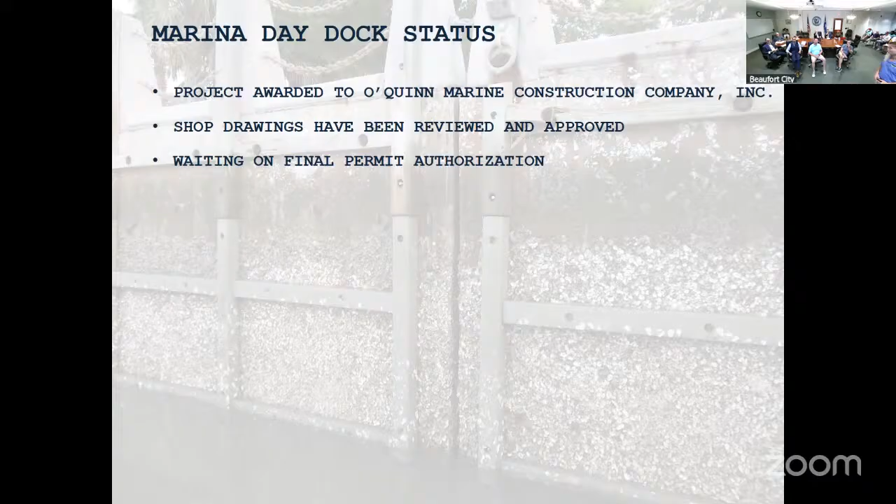So the project's awarded to O'Quinn. We've reviewed and approved the shop drawings, and we spoke about the permit already. Everything has been sent in a couple of months ago now, and everything is off public notice, meaning none of the other agencies or the public have had any comments. It's all a paperwork thing now, and I'm hoping a phone call or two to the right people will get some permits coming in shortly.

Just to go over the day dock, this was part of our scope in phase 2. What we did is we permitted the re-access of this. Originally, what we wanted to do was take this gangway off, send it to the manufacturer, have them take 5 feet off of it so we could put it back on a new platform we have to make, since we can't use the relieving platform and need a new platform to hold the gangway.

Our hope was, since this gangway is only 5 years old, to take it off, have them modify and certify it, then send it back for us to reinstall. But the engineers at CMI Gator who made that said it's a Warren truss design, and because of the way the truss is designed, we can't just hack 5 feet off of it. Engineers, what can you do? So unfortunately, it forced us to buy another gangway that we hadn't anticipated purchasing to get the access back, which did increase the price of the project. That wasn't foreseen at the time, but essentially a new gangway will go in. Let's go to the next slide.

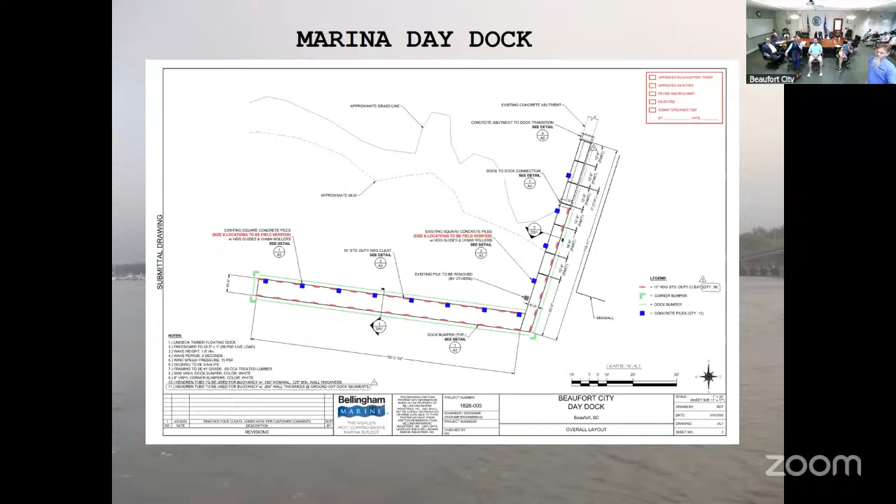So if you go back up a couple of slides, you stop it in the middle, you've got plenty of room past the trees. Go forward again, right there, stop, right here, so this is at 45 feet. If we're going to go another 80 feet, we'd be at the other end of there. Why didn't we do that originally? Well, originally we wanted to reuse this gangway, so that was not part of the original plan.

When we found out there wasn't really enough time to go back, we were trying to get this done quickly. There wasn't enough time to go back and rebid it with an 80-foot long gangway in here. So it was the best option.

But given more time, we could have potentially saved money, is that right? Potentially, I guess you could take this 80-foot long gangway off, turn it around, and have it go that way, then just buy the 75-foot long gangway. But then you're cutting this area off entirely. I'll be honest, I did not look at how far out this would extend with the other 80 feet, where that would be. Maybe it would be feasible.

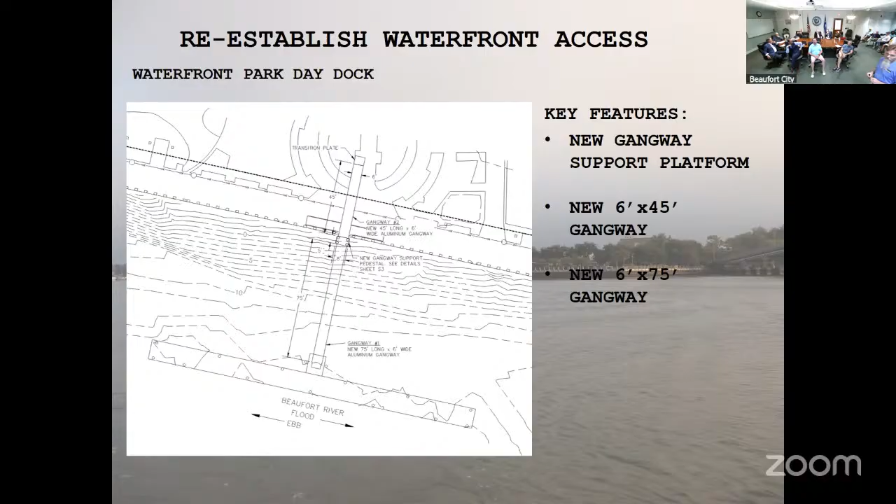The platform where the new dock is going to terminate — are those piers concrete or steel? They're steel, and they're driven. Yes, no concrete at all. Okay, beams? Round steel pipe, half-inch steel wall, 18-inch diameter, 70 foot long, half-inch thick steel plate, spiral wound.

These are galvanized — essentially the same pile that's holding up the floating dock. The piles going over here, just in terms of cost, we're getting coal tar epoxy; those are going to be black. We're getting them coal tar instead of galvanized because the thought is this is a temporary structure, not designed for 50 years, since presumably in the next couple of years we're going to replace the relieving platform and the tie-in and whatever connectivity we're going to have there.

If this was going to be a 25, 30, 40, 50-year fix, would this design look a little different? Probably — I probably would have used concrete piles and a concrete cap, but structurally this does what we need it to do for the next several years until we get our replacement in. So that will be 4 piles, then some HP 14 by 73 wide flange sections, and an aluminum frame that all the aluminum ties into. That's what we've got.

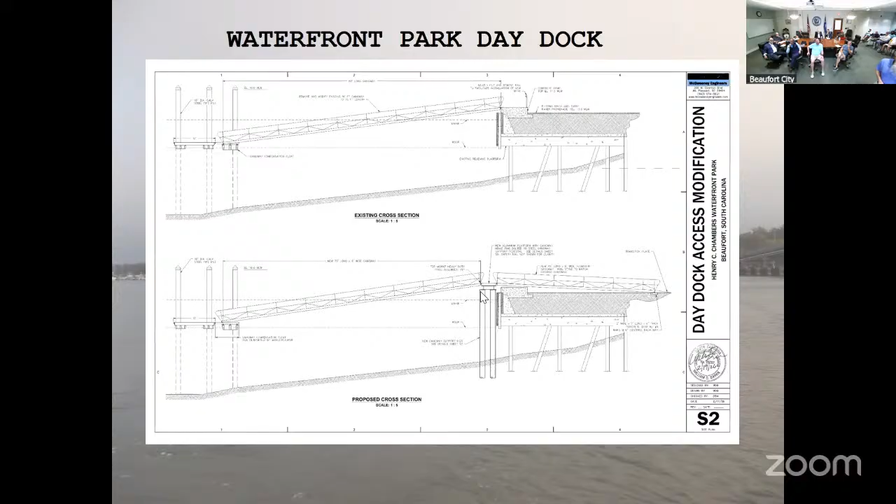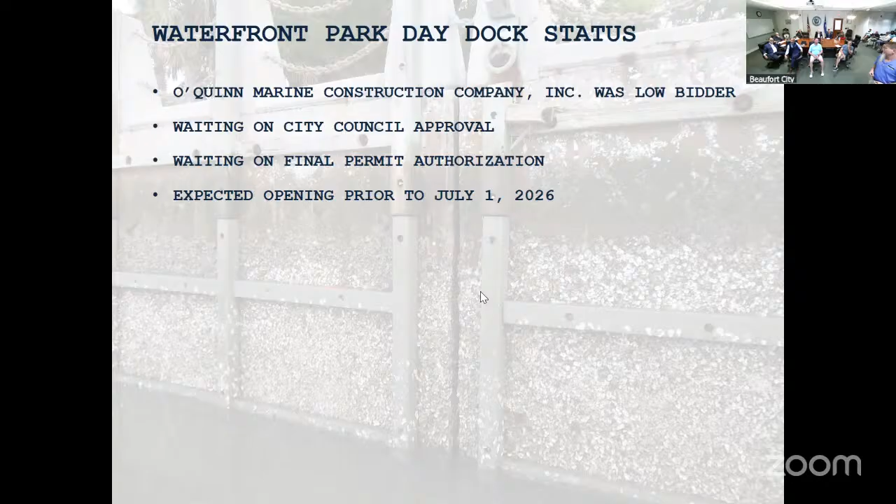Duncan spoke to this, waiting on the final permit, council approval tomorrow. Opening is expected July 1st.

Back into the actual phase 2. If you guys remember, we did the original investigation. We came in here and pitched 8 potential scenarios, just throwing it all at the wall to see if it could stick. We talked about that, took it down to 5 feasible alternatives, and said let's investigate a little more. At the same time, let's find a way to create renderings that engage the public and get some public input and engagement.

I know this committee developed the questionnaire, the poll you guys sent out. We got a copy of that and went through all the comments. A lot of the illustrators who made the renderings took those comments into consideration, so there was a conglomeration of what we'd talked about here plus your comments. We went through options: do nothing, repair, rebuild the platform essentially the same style as existing, relieving platform or wharf, rebuild with a seawall by filling it in, or do a hybrid approach.

Essentially what we did in this phase is just a little deeper dive into those and come up with some, hopefully, pretty pictures to engage the public. The thought is that we're going to do that next Wednesday. So if you will launch that PDF.

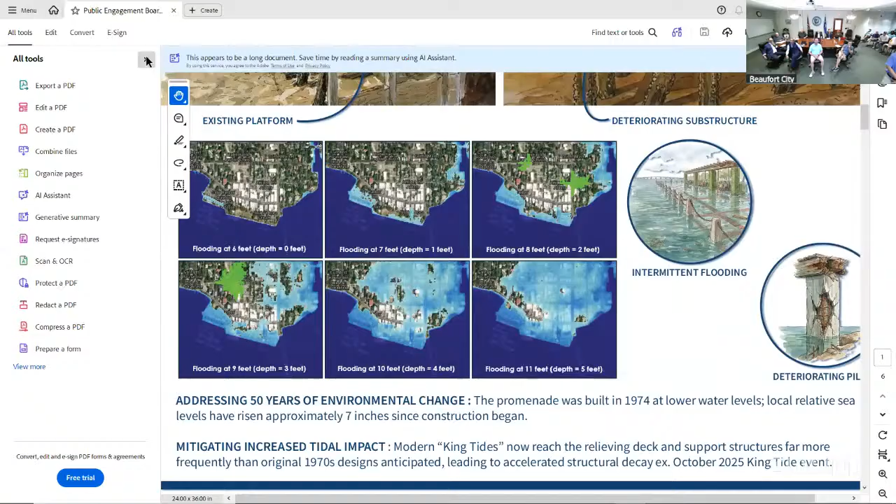The plan is to print, I believe we have six of these boards, out in large format, full size, and use them to engage the public over at the pavilion. We're still determining the exact method we're going to use to collect their feedback as a result of that presentation, but I'll go through the slides and show you what we got here.

This illustration of existing conditions out there does a good job showing some of the pile deterioration, a pretty good rendering of what's out there now. This line represents basically where the top of the platform is, as a representation of the inundation level, pretty much king tide flooding, right at about the level of the pier, maybe a little higher.

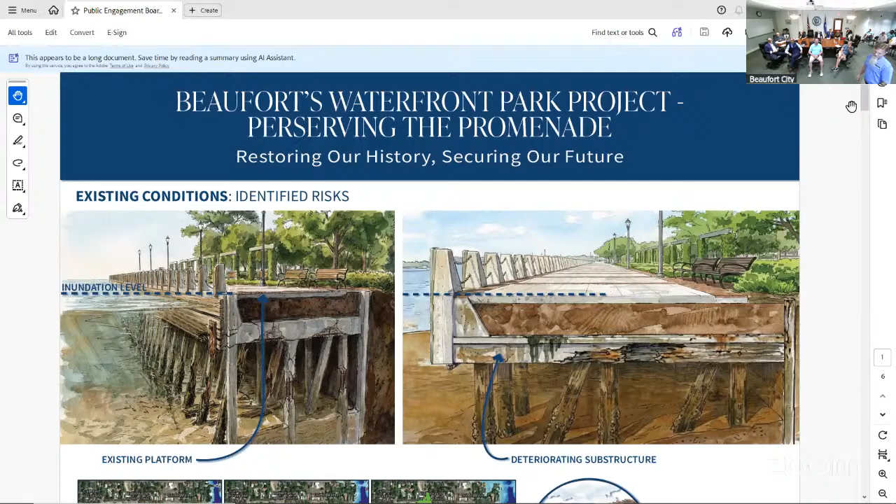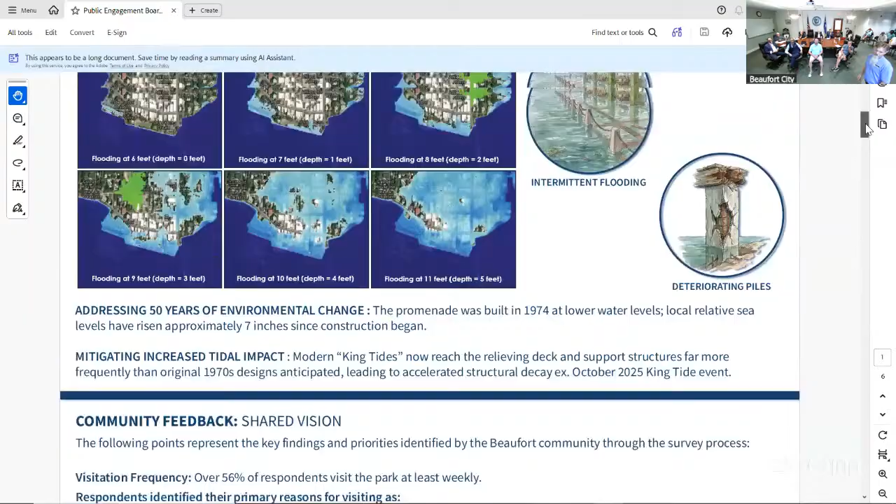If you scroll down on the same page, this will be out on the website as well. You guys have seen this graphic before that we discussed with you. It shows the flooding at 6 feet, which is about where the top of the platform is now, at 7 feet, the type of flooding you get, all the way up to 11 feet. If you remember from our real early analysis, we said at 9 feet is about the most we could do to protect downtown before you start getting wrapped around from the other side of the peninsula.

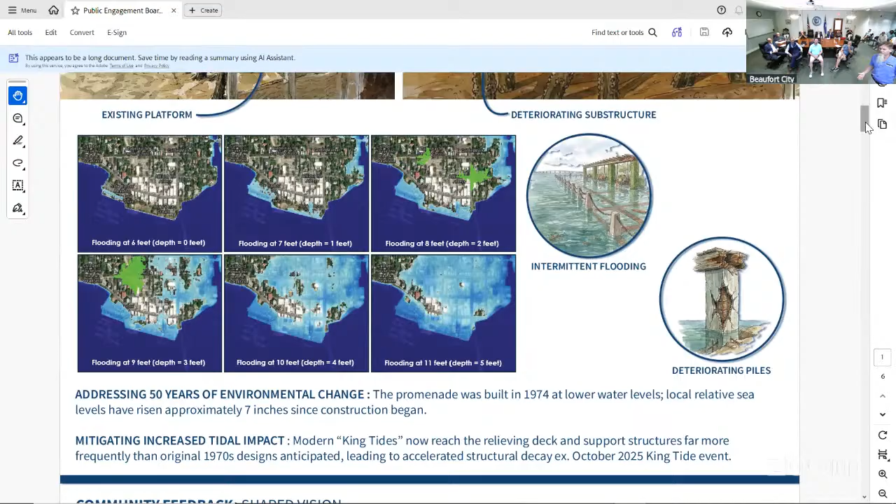And then we spoke to this thing called adaptive capacity - how do we meet that 9 foot elevation in the future when we're really going to need it, but not spend all that money today to get there? I'll go into that a little more, but this slide will also be up on the website for people to understand the flood conditions and the deteriorating piles, and that's the need for this project.

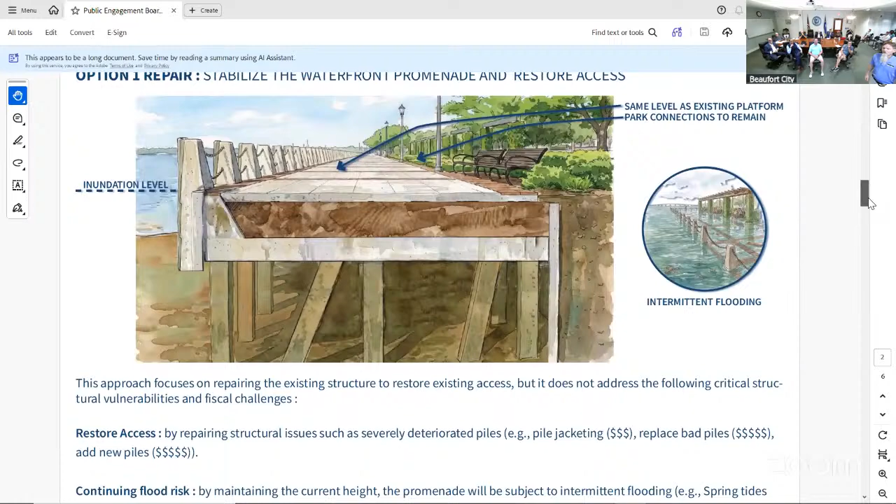If you go down to the next slide, scroll down a little more - I think this is the repair option, and the more we looked at it, repair is just not feasible because you have all this extensive shoaling in here. It's extensively shoaled in, so you don't really have access underneath. There are a lot of places where the mud line comes up to the bottom, and I can't even squeeze in up under.

This is 6 feet of dirt you'd have to dig through to get to the structure from the top. When you put all that together, you realize any repair scheme, if you could come up with it, could potentially end up costing more than just rebuilding the facility, just because of the logistics you'd have to go through to even be able to get to what you're working on.

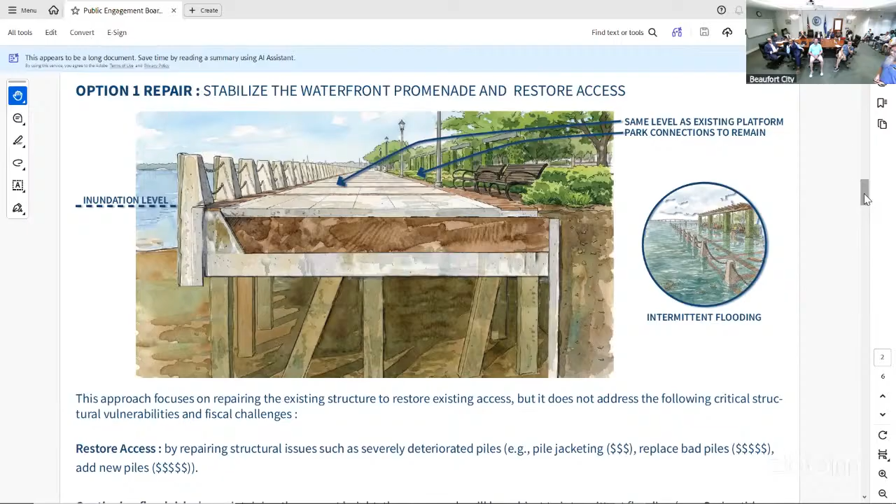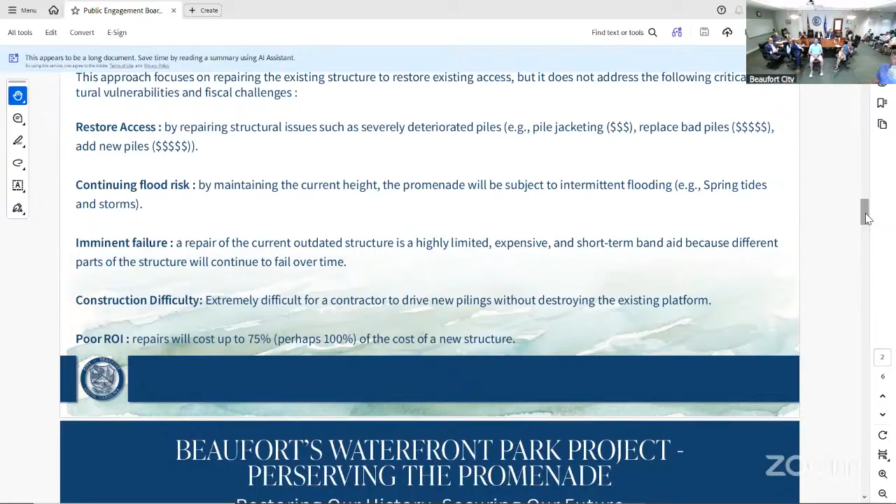You can scroll on down this page. I didn't want to just spend this time reading everything off to you guys in this format, because I figure we can spend that time more constructively. But we did put some language in here that's been reviewed by the city that speaks to the feasibility of these options, what the pros and cons are, because that's really what phase 2 for us was: a feasibility study. What can we go back to the people of Beaufort and say, look, we've really looked at this, we've looked at all the angles, and from a cost, regulatory, from all the angles, this is your best option.

So the other thing we want to do for the public meeting, whether it makes it to the public meeting or the website, is Eric had a really good idea. We have these gauges, kind of like a speedometer, with different criteria we've set up: permitting, cost, longevity, or whatever it would be, and just have little meters that show each option, where you rank on a scale of 1 to 100. It's just a 1,000-foot view of the impact of each option, a grade attached to each one. This is how we've kind of ranked them, and that's the type of input we're hoping to get back from constituents too.

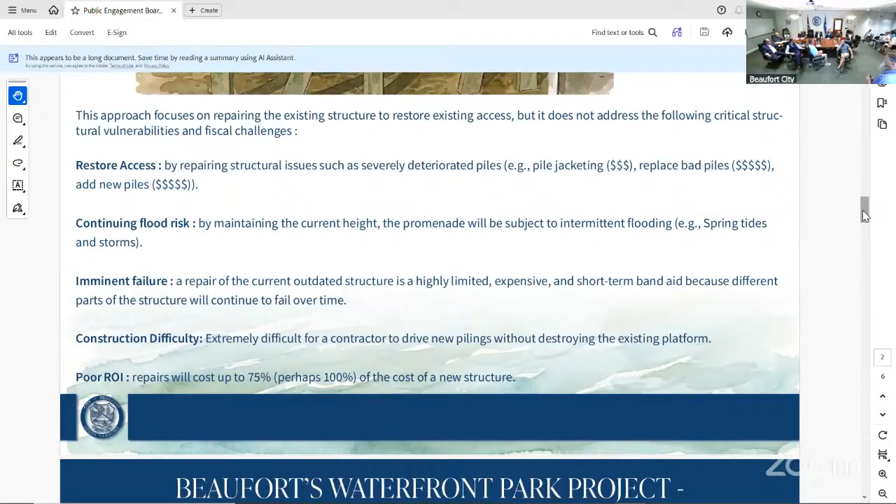And this website you're talking about, this is a city-dedicated website to the Waterfront Park project, separate from the capital projects portal, just to pull this off to the side and make sure there's one place where everything lives. One-stop shop. That has these videos from the Waterfront Advisory Committee, as well as any kind of details, past, present, and future for the project. Okay, like a clearinghouse. So yeah.

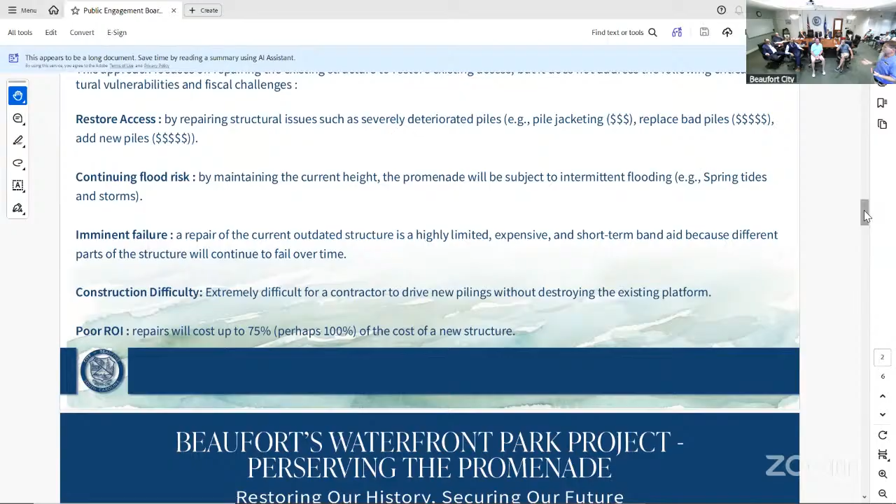So again, with the repair, it's a poor return on your investment. That's really what that comes down to as well. And I don't really know that a repair scheme would be any faster either, in terms of that. So you can go on down to the next slide.

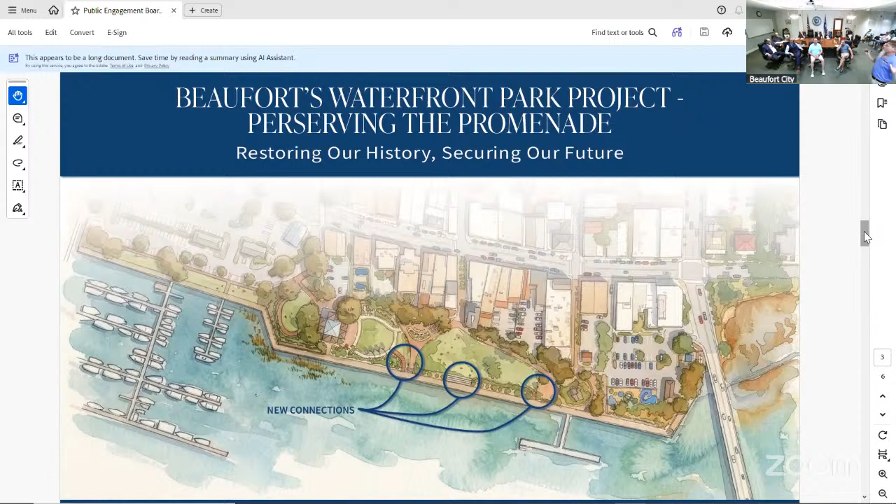So the next couple of slides are going to talk about the new structure alternatives. Option 2 is to rebuild back what you have. It would be the same relieving platform, but we would build it as a wharf. There's very little difference between a relieving platform and a wharf, it's a little semantics here. Basically, it's going to be a higher freeboard, and it's not going to have 6 feet of dirt over it. Everything else is going to be just about the same.

One of the things I'll point out is we haven't identified the best elevation yet to bring the pier up to. We know we can't leave it, and we know we don't want to leave it at the elevation it is now. We know we probably don't want to pay to raise it to 9 or 10 or 11 now, because that's more cost. Maybe we go to 7.5 feet now and add some adaptive capacity. In other words, we make sure the structure can handle a hydrostatic load that's 3 feet greater than it is today, so that we can account for it in 30 years, but we don't have to pay for it right now.

Part of raising the structure, the big thing with the functionality of the park is, how do you tie the park back into this new structure? If the new structure is 2 feet higher, how do you get the rest of the park, which already sits lower than the relieving platform, how do you bring the rest of that up? Because some of the park does sit lower.

So what we have come up with was based on the feedback from your guys' polling that said they like what they have. Everybody likes what they have, they want to have it back. We like the park, we like the swings. So we tried to make a nod to, hey, we don't want to change the park, it's clear everybody likes it. What we do have to do is just rework some of the transitions.

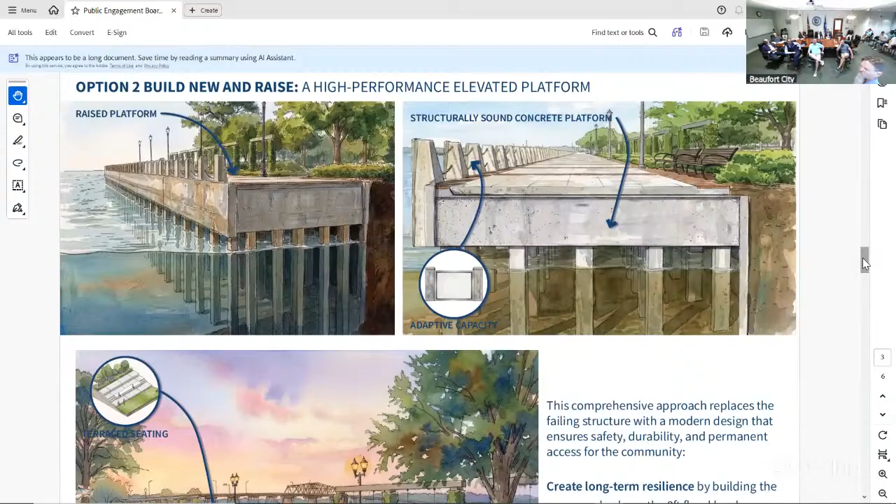I'll talk a little bit to that. That's where this adaptive capacity comes in, and I'll explain. So this is where we would be if we were to design this as a wharf, right? If you look at this, all we did was we just went up a little bit and we took the dirt out. There would be the massing of this, there'd probably be less concrete, right? The piles would come up a little bit higher. You can zoom out on that.

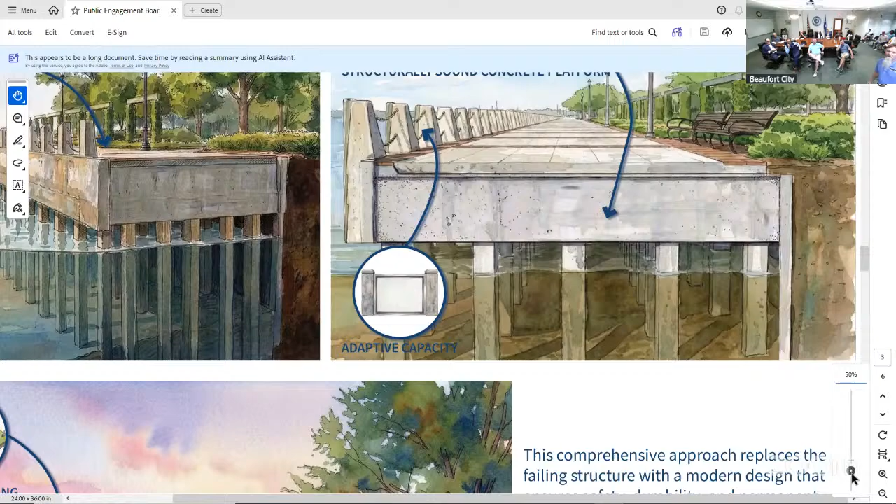What I was talking about with adaptive capacity is, let's say, one of the comments we saw from the public was they like the handrail and chains, right? That was part of the charm, the aesthetic. So that's why we're not showing this newfangled handrail scheme or whatever. We're going back with what our marching orders were, or what we at least thought they were.

So let's say we know that in 50 years we need to be at elevation 9, or we're going to get flooded. We're going to be right back to where we are today, or even worse, if sea level trends continue where they are. Let's say we build this thing now today to 7.5, we put the deck at 7.5, we get y'all another 18 inches. That gets us 20, 25 years, let's just say, that you don't even have to think about king tides.

Structurally, we will design it to where these panels could then be put back in between these handrail bollards. In 25 years, you could go back and put in a storm panel between the handrail bollards, and you could get your other 25 years of capacity out of that structure for sea level rise. You could get that.

For very little expenditure, we could design the structure now to be able to accept that panel in 25 years if you need it. So we don't have to design for an anticipated 50-year condition. We can have some adaptive capacity in there. So if you didn't like the chain idea and this needed to be some other type of fencing to meet a code, this could be chain link.

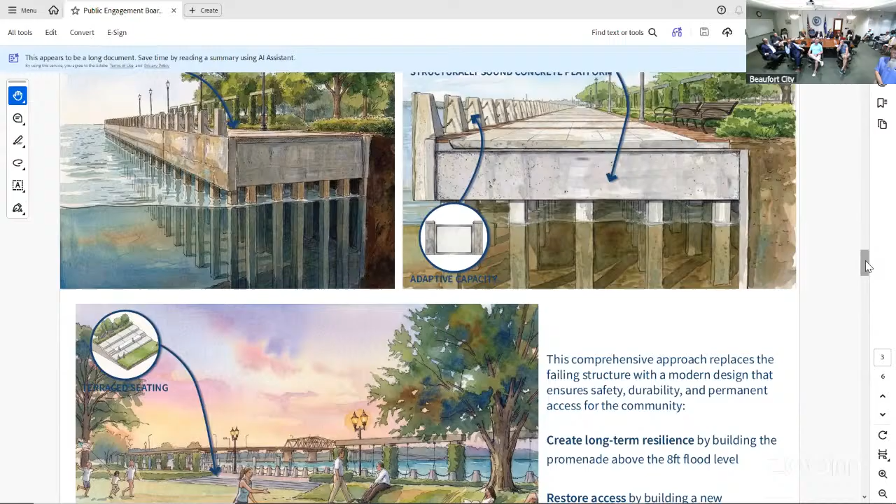Right now, what you have is all concrete - it's all concrete sheet pile. All the seawall is, even over by the marina, and those unfortunately are notorious for leaking and not maintaining tight joints. If you scroll down just a little bit, I'll continue on - you can stop there.

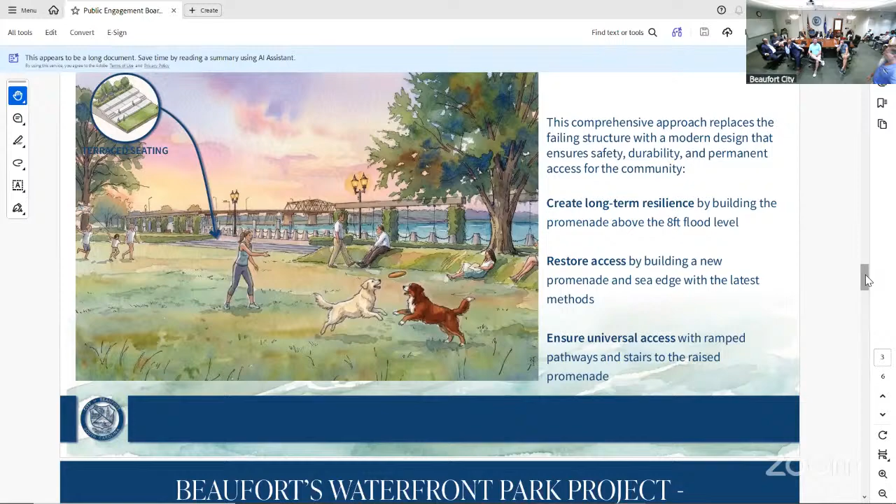So this is just an idea, a concept of what it would look like in the park with the new elevation of the pier, with that pier being 2 feet taller, 3 feet taller. This just shows the transition - this could be an earthen type of knoll, this could be those brick planters that are out there now. We can extend those with the radiuses they currently have to match that motif. And then this is another potential where you just have some kind of multi-purpose seating.

Some of it mentions stay benches, some of it's more like stadium seating. Just some ideas of what to consider on the inside of the park, but by and large, you can see that visually, there's really not much going to change. There's no huge difference in visual impact from what you see today towards what we're projecting it's going to look like in the future.

And I think if we read the room right on your all's poll, that's what we took out of it, that they were happy with what they had. Of course, everybody's got their own little thing.

If a hurricane breaches that, are we gonna have enough drainage built in where it can drain out because it's gonna be trapped there? Well, to some extent, I think you kind of have this bowl condition now in parts of the amphitheater area, and I'm assuming that it drains now. Part of the redesign will have to address drainage. That's just gonna be, you guys know the deal. Anytime you stick a shovel in the ground around here, you're gonna have to deal with some kind of drainage in perpetuity just because of how low everything is built.

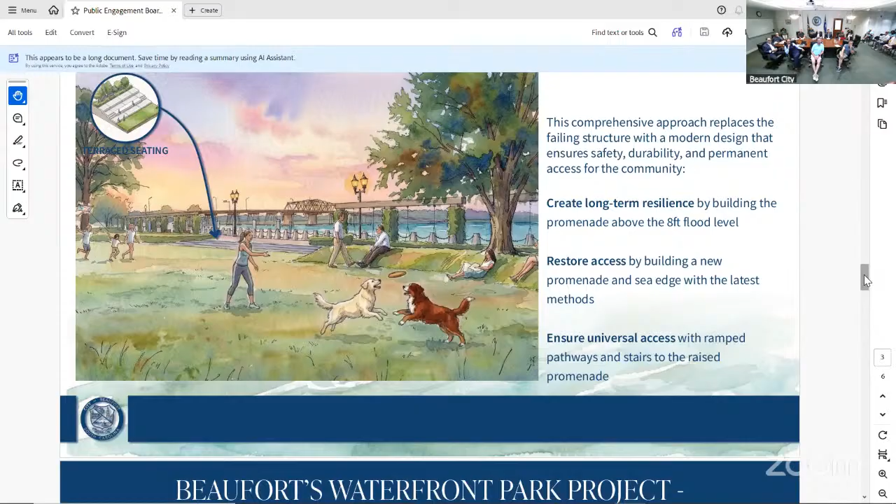This is the same thing, same option. You can just scroll down to the bottom of this page. This is the kind of seawall option that was discussed.

Quite a few of us, quite a few people asked the question, well, hey, why can't we just fill it in - that's going to be the cheapest, easiest way to do it. Well, since our last discussion, we did get final clarification from OCRM that the critical line is currently right here. This is where the critical line is.

And so that 40 feet, well, it's really 36 feet, that 36 feet all the way out to the edge of the platform would have to be filled. Because they're looking at all that's under the relieving platform now, even though there's trees growing out of the top of it, water's flowing under it. So they consider that state waters.

It's a resource, it's part of the resource. So just filling it in would not be... is it an insurmountable regulatory hurdle? No. You could probably get past that if we showed through an alternatives analysis that this was the best option, and we could probably wordsmith that into the best option. But then it's highly probable you would be faced with having to pay for mitigation. So it's kind of hard to say, well, it's the most environmentally responsible option, but we've got to pay millions of dollars into mitigation because we're filling in this much wetland.

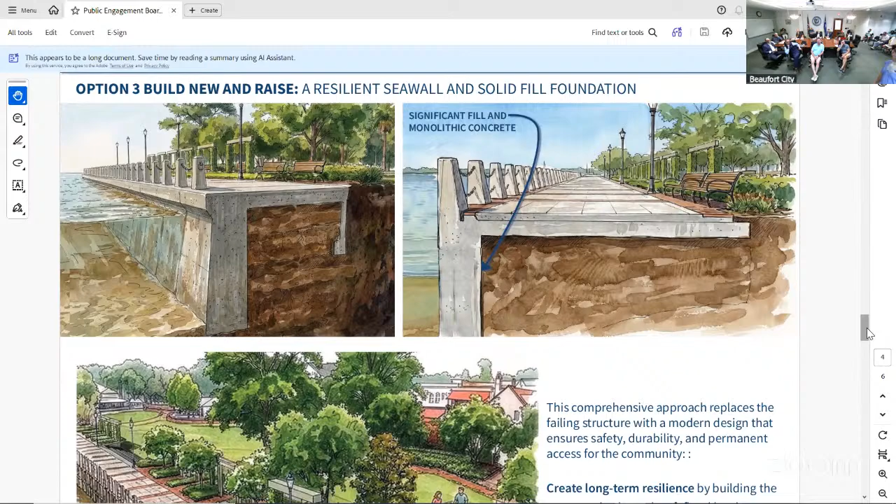If you scroll down just a little bit - nope, not to the next one, just a little bit. Sneak peek. No, yeah.

So this really speaks to the whole thing I've been telling you guys: let's go back with basically what is there, because that's what everybody wants - tie-ins. And this shows some potential steps down, some ADA ramps to have some connectivity. I think the plan view shows another one that goes back in there, and the light.

So the fence now - okay, this is good to show where the fence is now, about right around in here somewhere. So that gives you some idea of, okay, well, do you then move the swings back, or no? You probably wouldn't want to do that. You're going to put the swings probably founded on the new structure, and then we're going to have to determine, well, okay, what does that look like?

Do we want to have planters around that with this whole green thing, or what? There is going to be a lot of aesthetic considerations that go into that, which I would imagine there will be.

You still have to allow for traffic on the platform too, with the swings and the greenery. Sure. And right now you've got the space - right now you've got more than enough space. I think you've got 24 feet, I think this is 24 feet right now out there.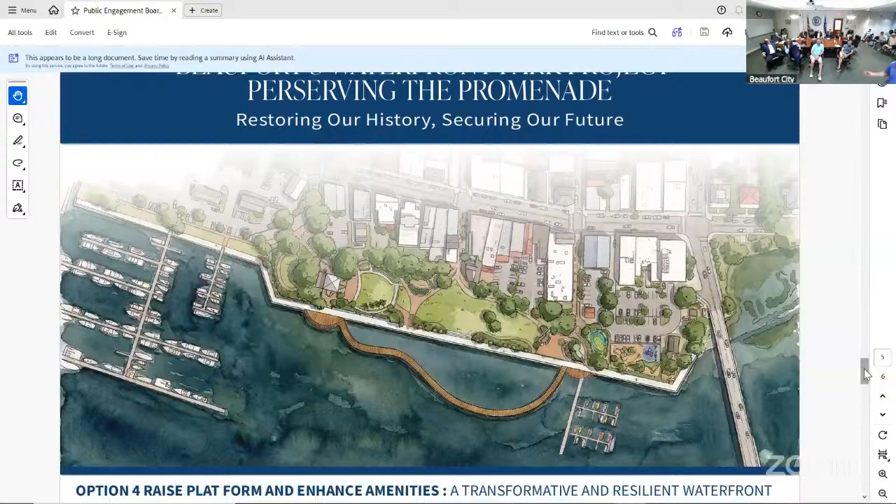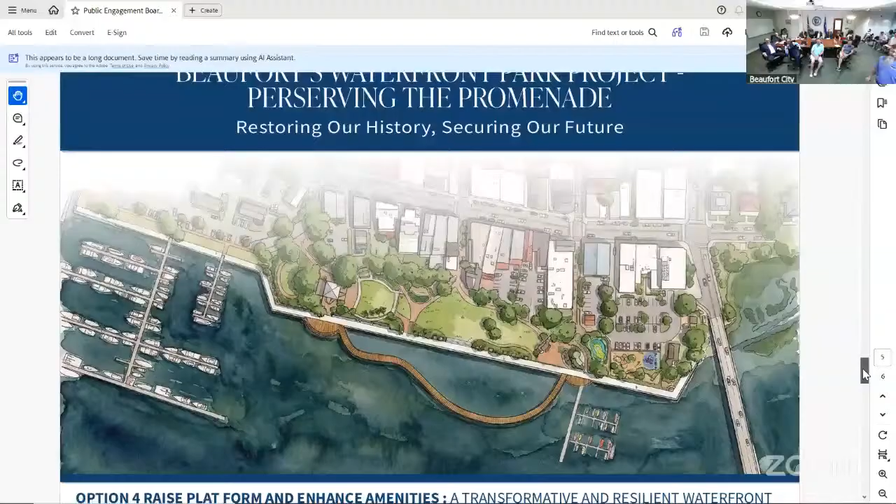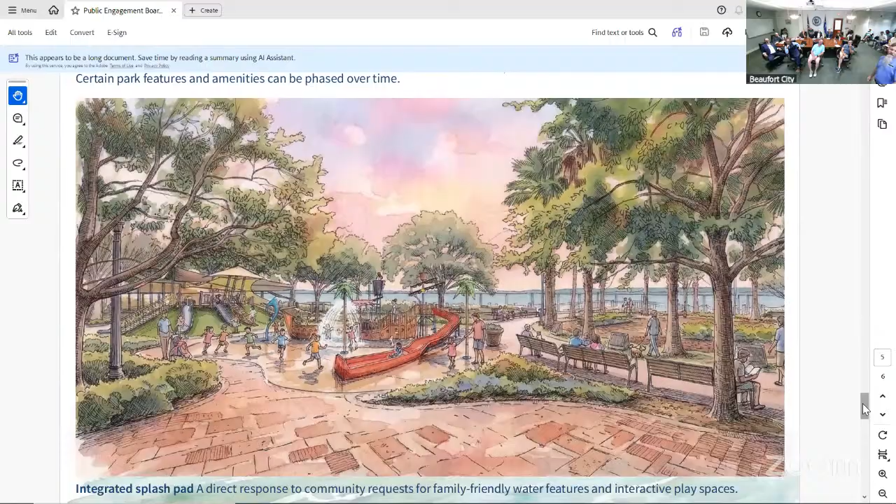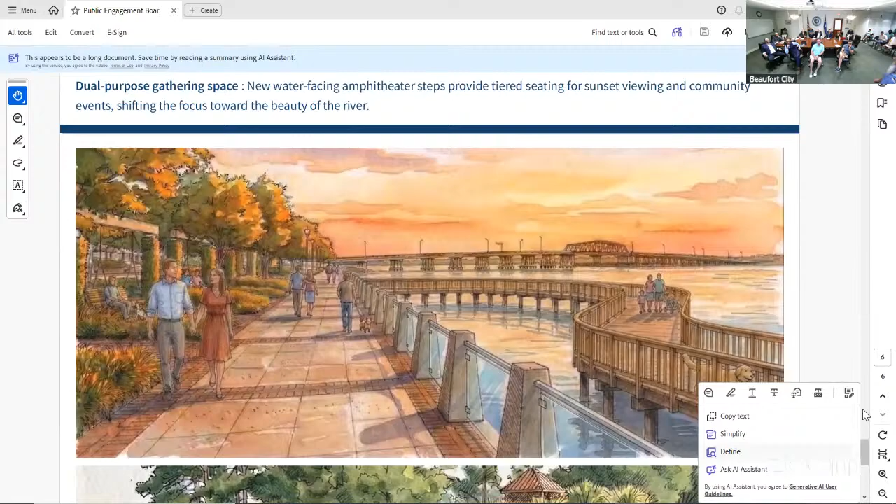Go down to the next slide. And this slide is really just to get people thinking outside of the status quo box. Yeah, go down to that one. So this shows the rebuilt relieving platform with a stroll out into the water. Here's the original, or here's the handrail bollards. And then we're showing the infill panels for some adaptive capacity in the future. So these are panels that could be added later, right, if sea level rise is projected to keep going where it's going. That dog's in trouble, by the way. Yeah, that's stuck. I don't leave either.

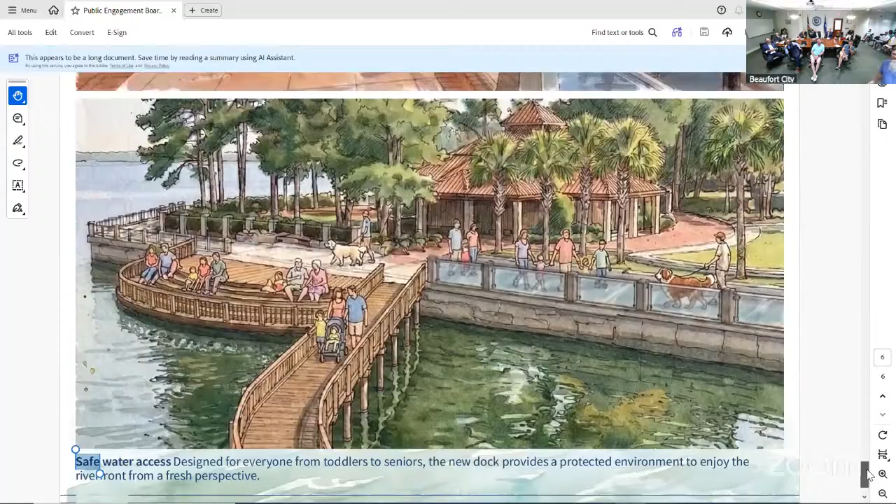So what's the next image down on this one? This is a good one too, just to illustrate to people, look, if you want a mechanism to get people closer to the water or out on the water, if that's your vision, if that's the way you see the future of Beaufort looking, then speak up. These are just ideas to foster the conversation. And we knew that when we did them, we were going to get more rejections than anything, but hey, you guys paid us to do it. So that's what we did.

This again shows the standard concrete handrail panels that we could have the chain here. We could fill that in with some other type of fencing. And then we could add the adaptive capacity.

For the public renderings and the public charrette, could we have the chains presented there as opposed to the panels, just to keep the consistency of what it would be and not be too much of a dramatic change? Because I wouldn't want somebody to get locked in on this and say, well, I don't want this rendering because of the panels, but not necessarily rule out the boardwalk, if that makes sense. So yeah, well, they're all optional too. Yeah, we have them on a couple of different options. I'll be honest, I don't know that I can go back and change any graphics before we need to send them out to the printer, at this point, to be able to re-render these.

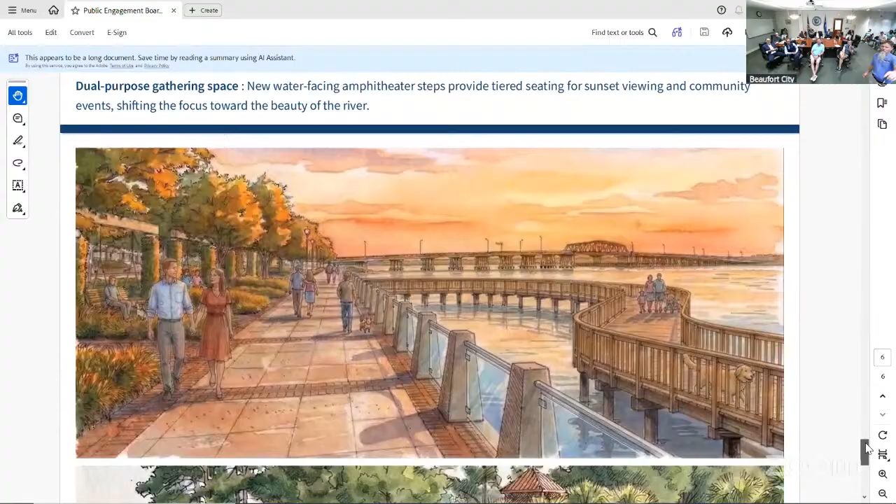You gotta have it almost to the left there. But yeah, I mean, you can see this is more of the hybrid concept that we think everybody's going to pretty much dislike. Now, if you go up to option 2, you'll see where I basically broke it out, because we only show the hybrid down here on that. We only show the storm panels down here on this hybrid solution, I think.

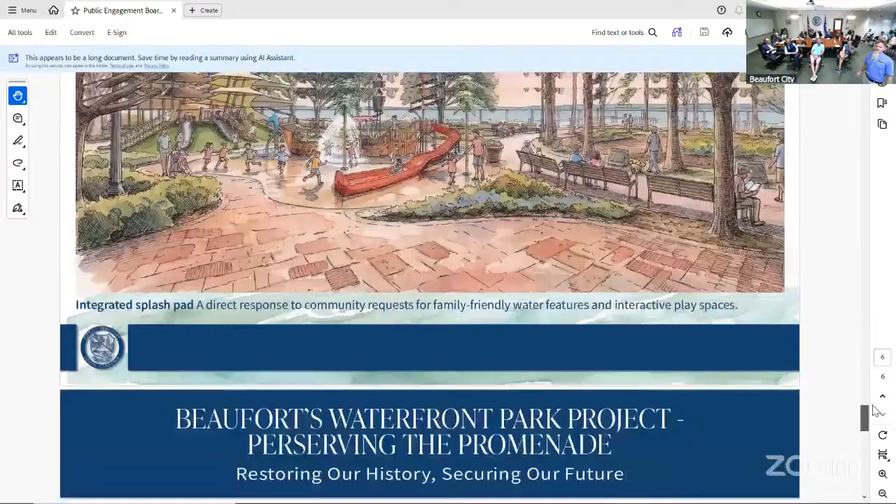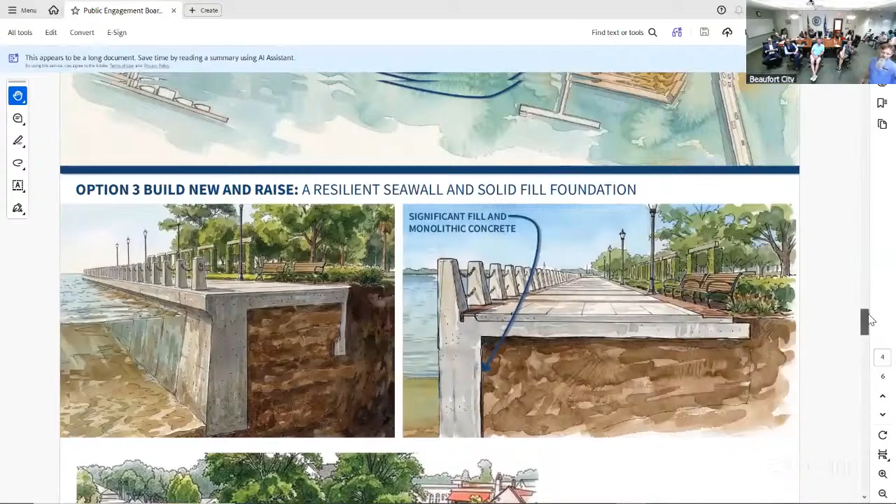Can you go up to the? And I wouldn't want the hybrid 2 solution to get canned because of the panels. Yeah, so like on here, we show the chains, and then if you go up here, chains, and I show the breakout of the storm panel and just kind of speak to that, as far as the adaptive capacity. So, I mean, I really view it, it's my job to explain that to them, but I can ask the illustrators and see if that's a change that can be implemented.

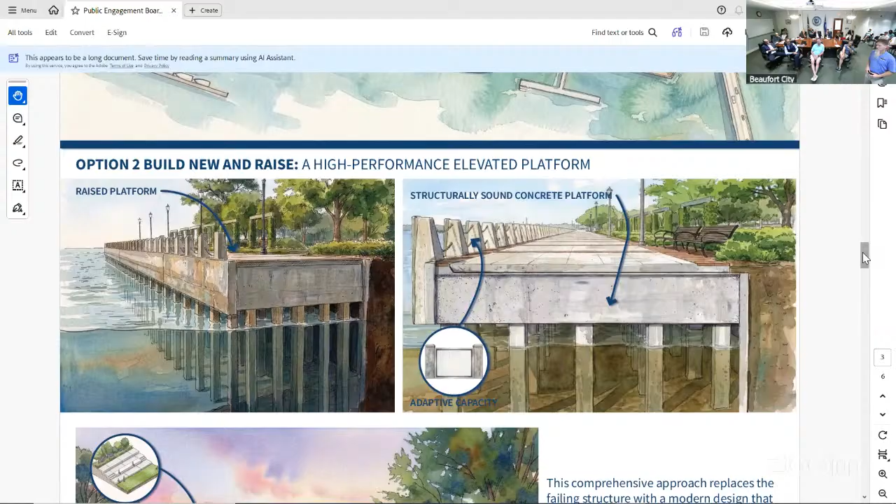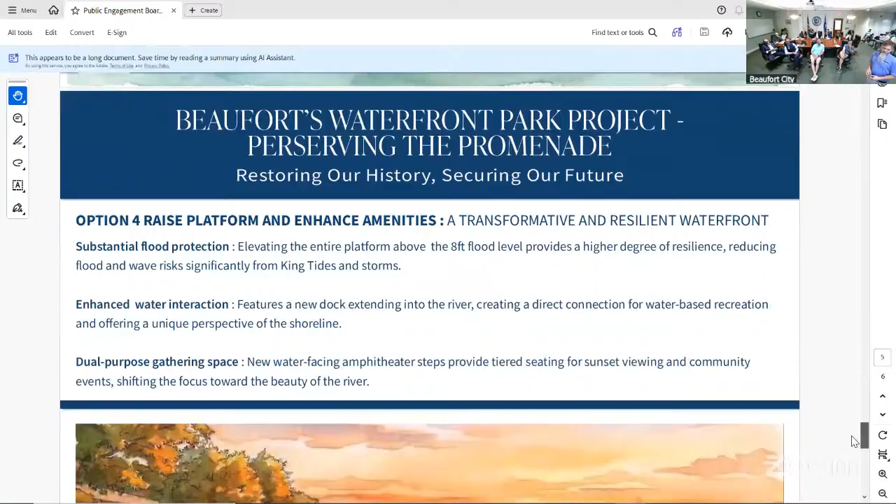It's obviously way down the road. I know you guys are just throwing ideas out there, but would the wooden walkway be hurricane resilient, or would we have to be replacing that? Again, that was just ideas for how it was rendered. I mean, I would imagine something like that, if there was a lot of support for it, would probably be concrete or something like that.

What's the main benefit of something like this with the walkout on the water? You can't tie a boat up to the relieving platform now, can you? And you also can't get to the dinghy dock.

With the hybrid solution, it was just one of those things to let people know that we didn't come into this with blinders on. We wanted to let the people in the city of Beaufort know that if you want what you got and you want that back, that's fine, but it doesn't have to be that.

And that's how we were trying to get people's input, just coming up with something crazy and saying, tell us why you hate this, which is great because you can find out a lot just by what people hate.

So, I hate it. Good, good. Just so you know.

Please come to the public forum and make your comment known. Your vote counts just as much as the next person. If we get 100 people to show up to the forum, and we have a survey, and 75 say they like this, is that the direction we're going? Who's gonna make that decision? I'm not making that decision. I'm not making that decision either.

Can you talk a little bit about the format for the charrette, what time of day, who's gonna be there, and how it's gonna proceed? We met just before this meeting to put some of those together, and Scott and Eric can speak more to it. What we had planned was next Wednesday, 5 to 7:30 or so, giving people a half hour to get there, and then I'll do a very similar, albeit quicker, presentation.

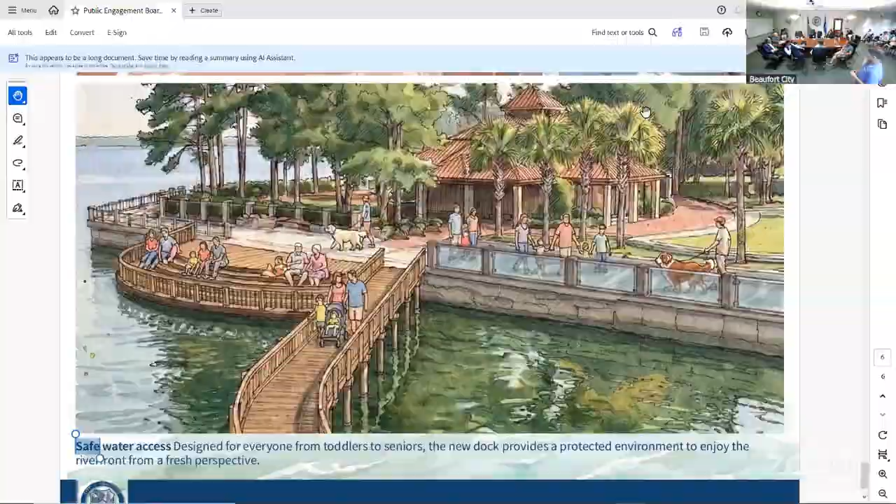One thing I hope will happen is before anything gets finalized, after the charrette, there'll be some reconnoitering and revisiting. I think it comes back to this committee before it goes further. Yeah, at the May 4th meeting, I would anticipate that staff would bring back to you the results of the feedback, regardless of what kind of mechanism we used -- what did the people who attended the charrette say, and what other feedback have we gathered since the presentation. We would bring that to you, and then at some point this committee should make a recommendation to council as to which way we should go with the design.

After the May 4th meeting, or at the end of it, you may not be ready to decide. You might just want to hear what people have to say at that point. It may be that you want to discuss it further and have an engineer present.

So can I ask this? Regardless of which design alternative we land on, what's there, at least in part, would have to be demoed. So is this process holding you guys up from getting started on the demolition, or is there a way to go ahead and move forward with at least that portion so we can get it behind us, and then once we decide the chosen path, you guys would be that much further along? Does that not make sense?

If it was me, I probably wouldn't demo anything until I had a permit to rebuild it. I wouldn't demo anything until you had a permit in hand that says you can put back what we want to put back. You'd be restricting that much more of the park by having your demo equipment there. I would want to make sure I had a guarantee that I could rebuild my marine structure before I took the old one out.

Even though what's currently there is not - yes. That's my recommendation, I think you'd rather. Duncan, you see any benefit? That's putting the cart before the horse. You may need to use that as a bargaining chip.